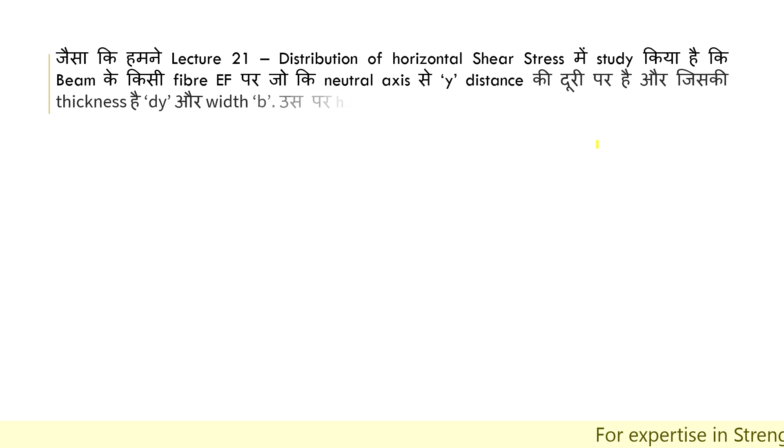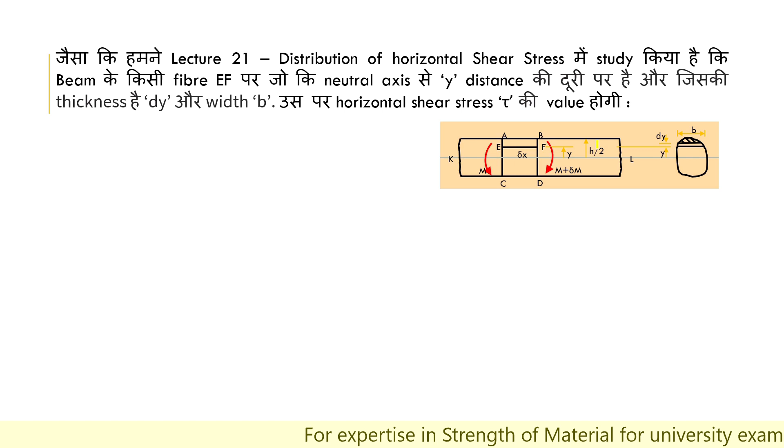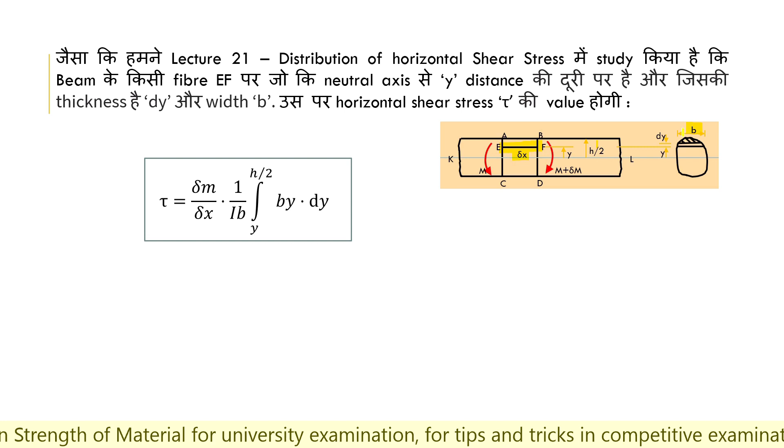As we studied in Lecture 21 on Distribution of Horizontal Shear Stress, for a fiber EF in the beam, at a distance y from the neutral axis, with thickness dy and width b, the horizontal shear stress tau is given by tau equals del M by del x times 1/IB times integration of b y dy from y to h by 2. In this figure, this is the fiber EF of length del x and width b, visible in the area of cross section, lying at a distance y from the neutral axis shown by the blue line. This is the general equation giving the value of horizontal shear stress in such a case.

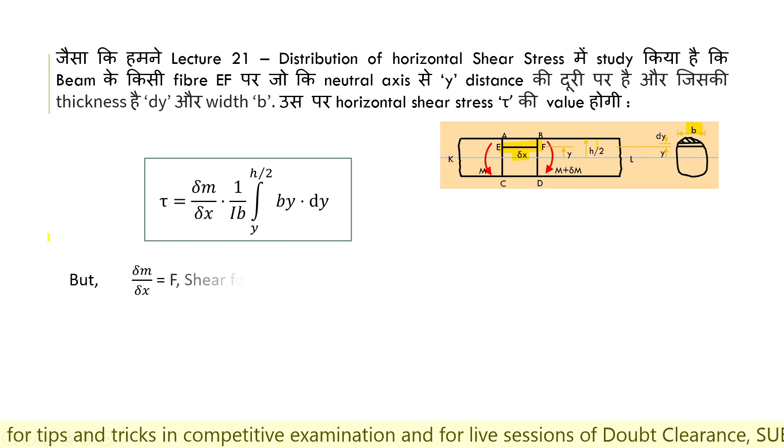Now we know that del M by del x, the differentiation of moment with respect to x, is equal to force - this is the shear force at the section. So we put this value of del M by del x equal to F in the given equation. We get tau equal to F upon IB, integration of b y dy from y to h by 2. Let this be equation B, which is the generalized equation.

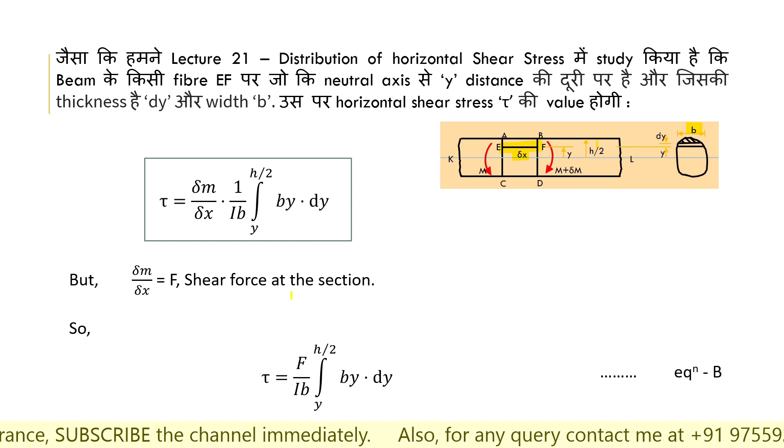This equation we had derived earlier. Now we will use this equation, equation B, for our derivation of the cases of rectangular and circular cross section. So now we will use this same equation further.

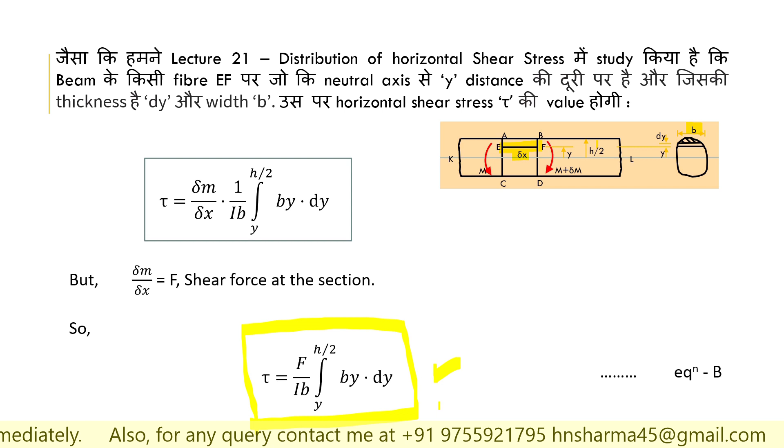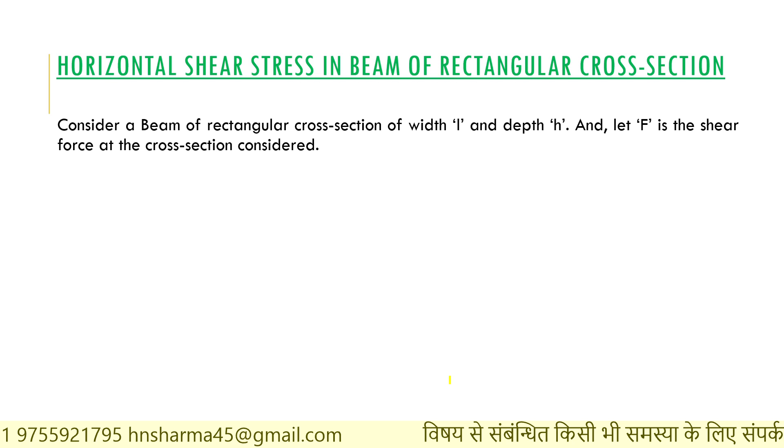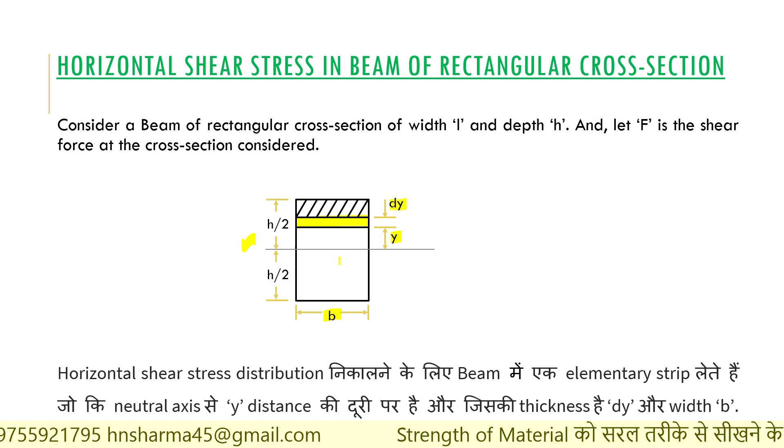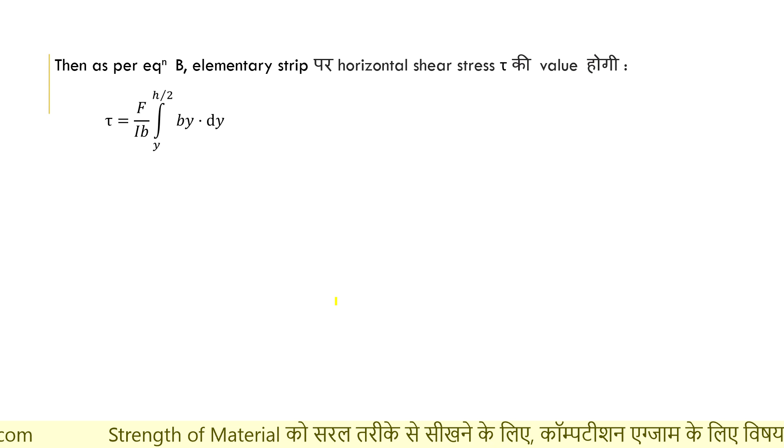Then, as per equation B, the generalized equation we will use here, the horizontal shear stress tau on the elementary strip will be tau equal to F upon IB integration of by dy from y to h by 2. Integrating further, we get F upon I times y square by 2, because b gets cancelled out as it's a constant value, and integration of y gives y square by 2, with limits from y to h by 2.

Further simplifying, we take out the 2 since it's a constant. So we get F upon 2I, y square, with limits from y to h by 2.

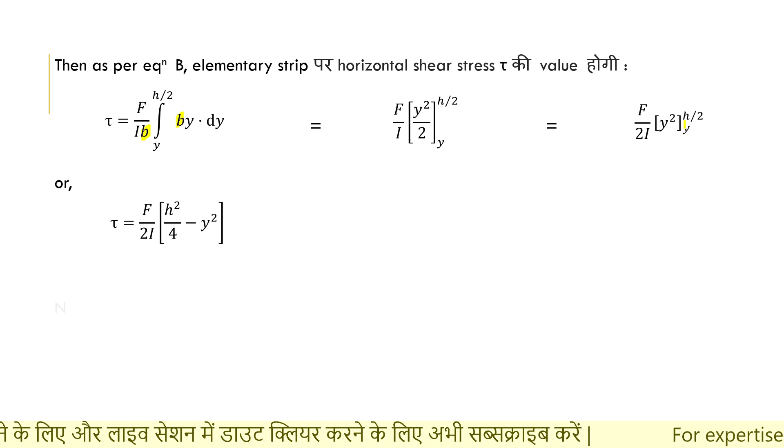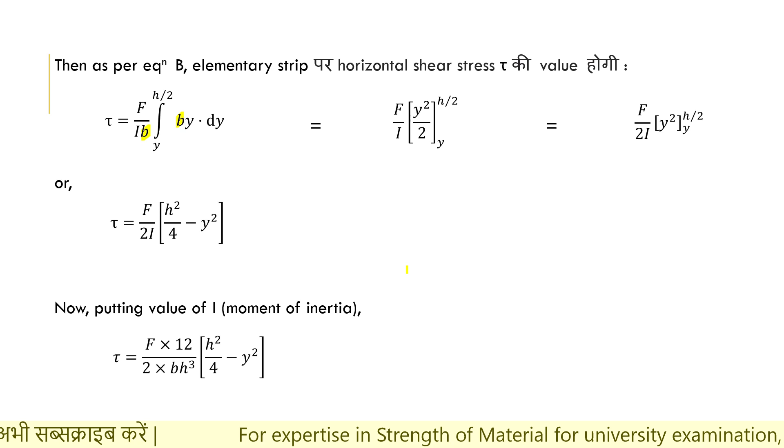Now putting these values of h by 2 and y, we will get tau equal to f upon 2I into h square by 4 minus y square. Now putting the value of moment of inertia I, we know moment of inertia for the rectangular cross section about its neutral axis is bh cube by 12. So putting this value in the equation of tau, we get tau equal to f into 12 by 2 into bh cube, into h square by 4 minus y square.

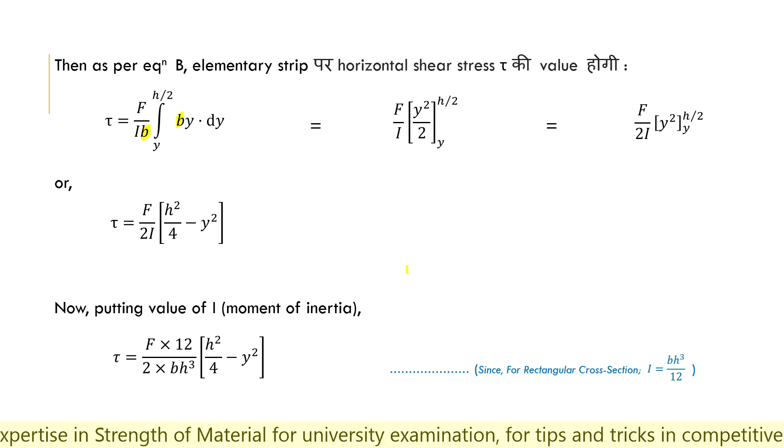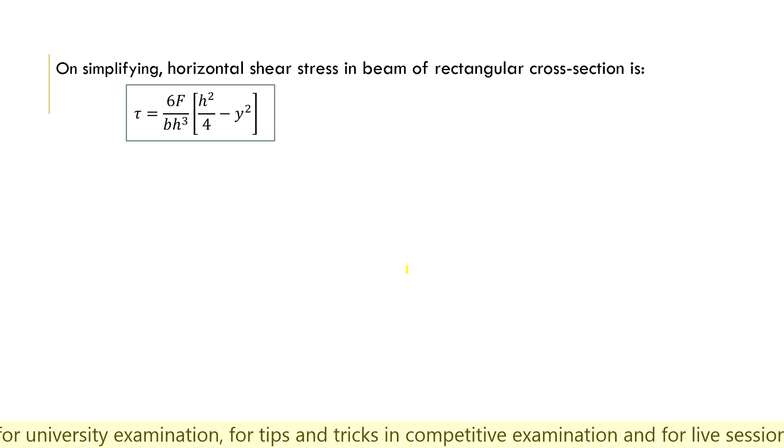Since for a rectangular cross section, I equals bh cube by 12 as we just discussed, simplifying it further, the horizontal shear stress in a beam of rectangular cross section is tau equal to 6f by bh cube into h square by 4 minus y square. This is the equation that gives us the value of horizontal shear stress in the beam of rectangular cross section. Let us say this is our equation number 1.

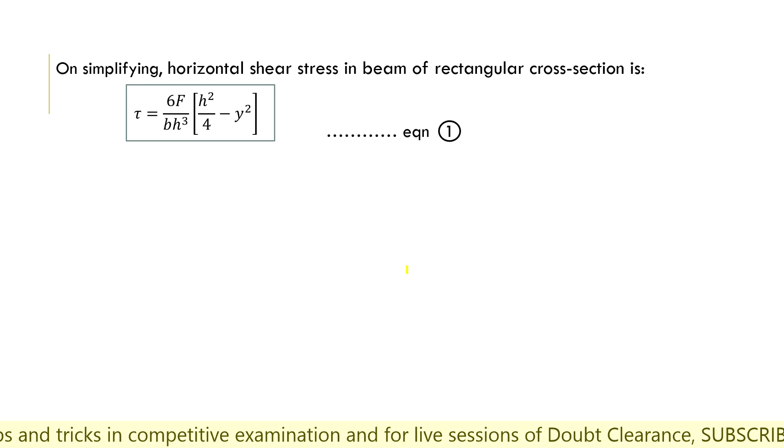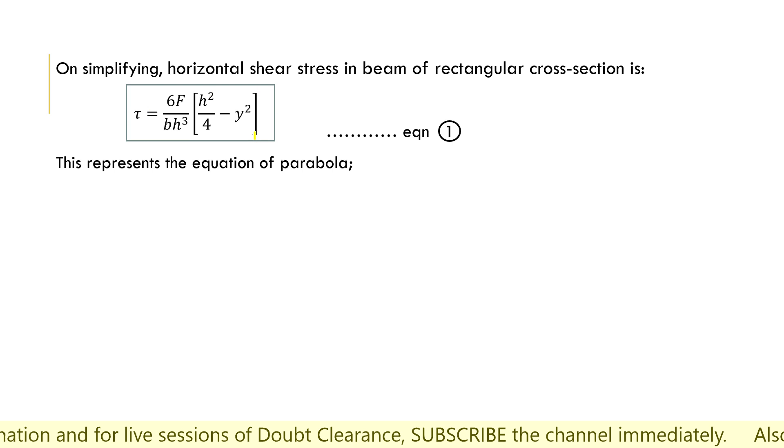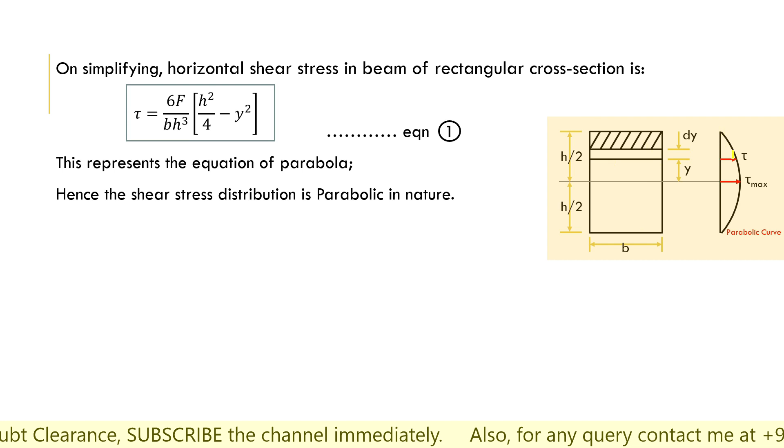This represents the equation of a parabola because here we have minus y square, so this is the format of a parabolic equation. It means that in a rectangular cross section, the distribution of horizontal shear stress is parabolic in nature, as we can see in this diagram. Here this is the rectangular cross section and this is the line of the parabolic curve, marked here. This parabolic curve represents the parabolic distribution of horizontal shear stress. This vertical line is for reference, and this curve represents the distribution of horizontal shear stress in case of rectangular cross section.

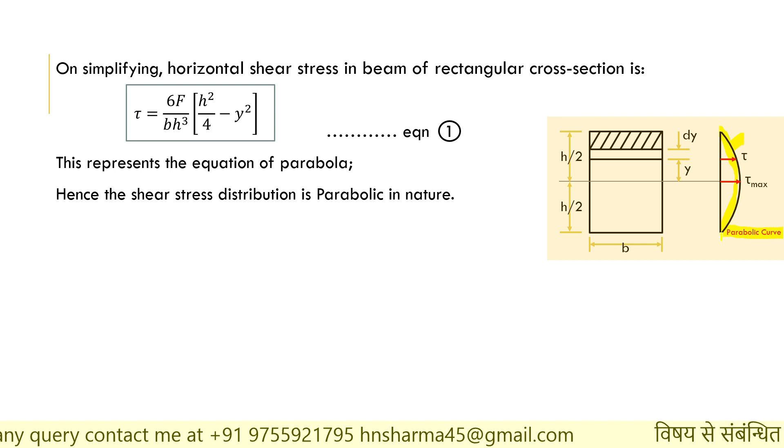Now at y equal to h by 2, meaning at the top fiber or at the bottom fiber, putting this value of y equal to h by 2 in equation number 1, we get tau equal to 6f by bh cube into h square by 4 minus h square by 4, which will be equal to 0. So at y equal to h by 2, meaning at the extremes, at the top fiber and at the bottom fiber, the value of tau at both places will be 0, and this is also visible here - the tau is 0 here, and the tau is 0 here as well.

And at y equal to 0, meaning at the midpoint or at the neutral axis, putting this value of y equal to 0 in equation number 1, we get tau equal to 3 by 2 dot f by bh. This represents the maximum value of shear stress on this rectangular cross section, and we can see this in the diagram here. Here you can see this is the portion of maximum shear stress, tau max, which we have marked here. So this lies at the neutral axis.

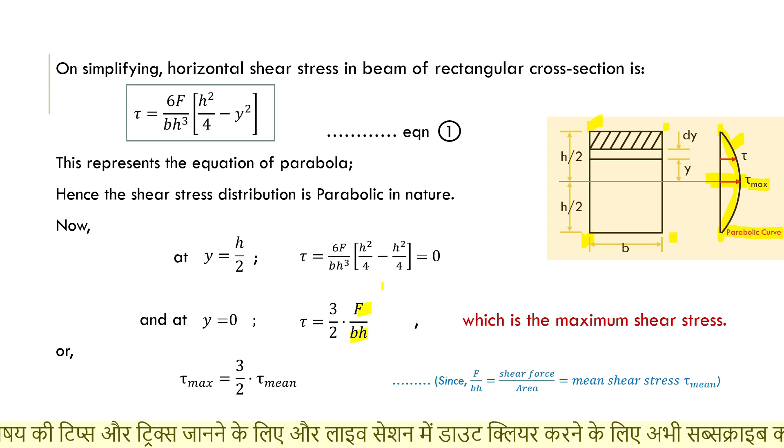Now we can write that tau max is equal to 3 by 2 of tau mean, because f upon bh, which we have written here, is shear force upon bh meaning area. So force upon area is basically the mean shear stress. So it means that tau max will be equal to 3 by 2 of tau mean for the case of rectangular cross section. Now let us find out the value of horizontal shear stress in a beam of circular cross section.

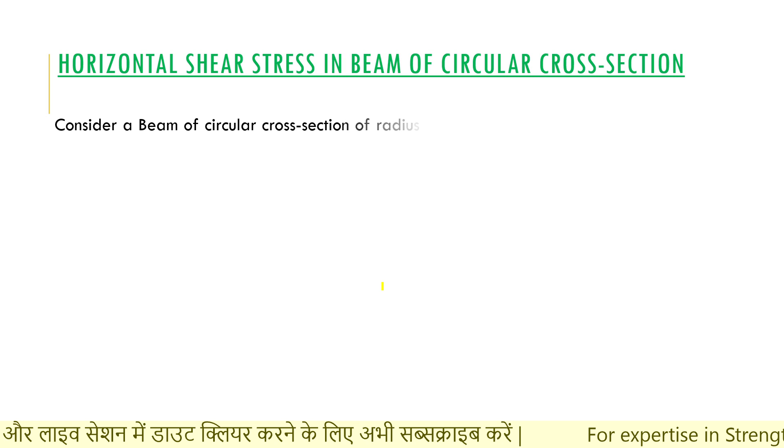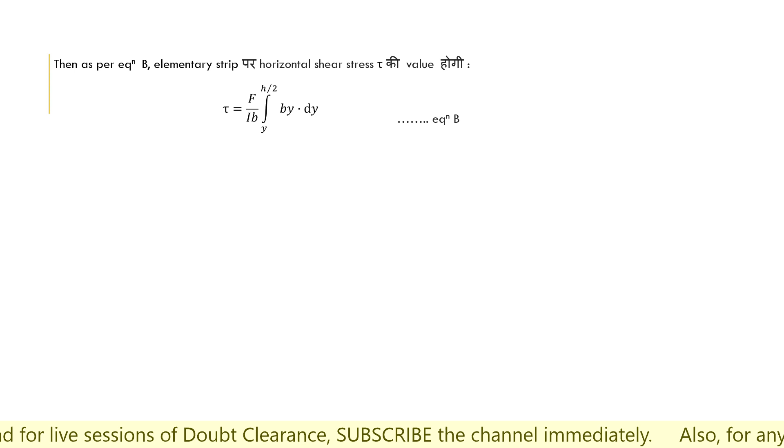That was our equation number b. Now from the figure we have y equal to r sin theta.

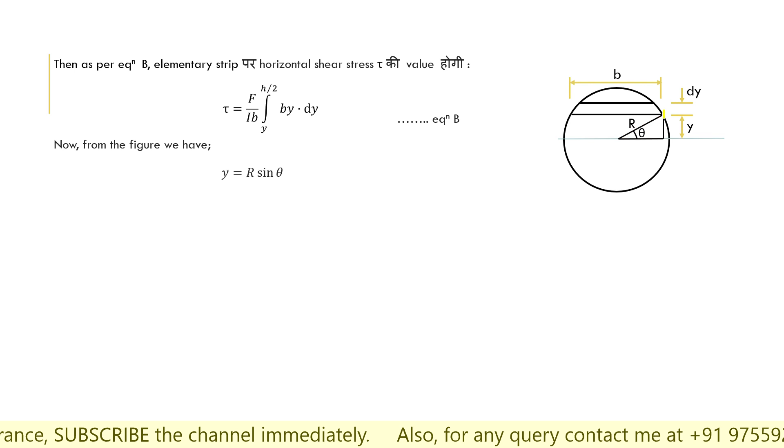We can easily see here, I have made a slight construction. This is the radius r, from here I drew a vertical line and a horizontal line. Now this angle is theta, so we can easily find out with the help of geometry that this vertical height, that is y, will be equal to r sin theta, and b, that is the width of this strip, this is equal to twice of this distance, meaning r cos theta.

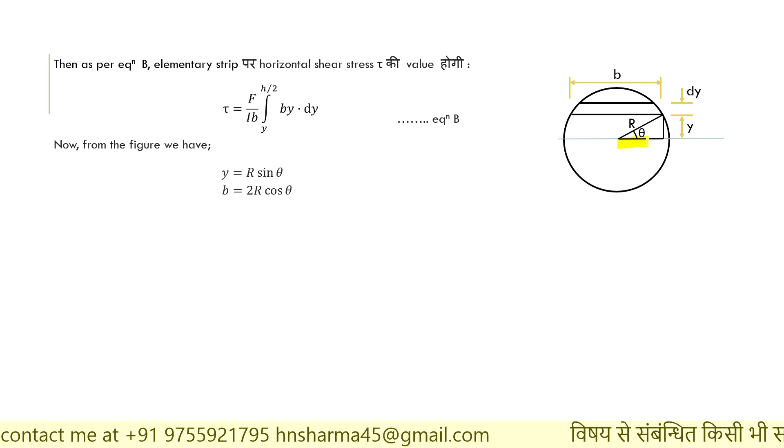R cos theta means from here, center point to this point, this is r cos theta, and since b is twice of this distance, so b is equal to 2r cos theta, that we can easily understand. Now let me draw the enlarged view of this particular area so that we can easily calculate.

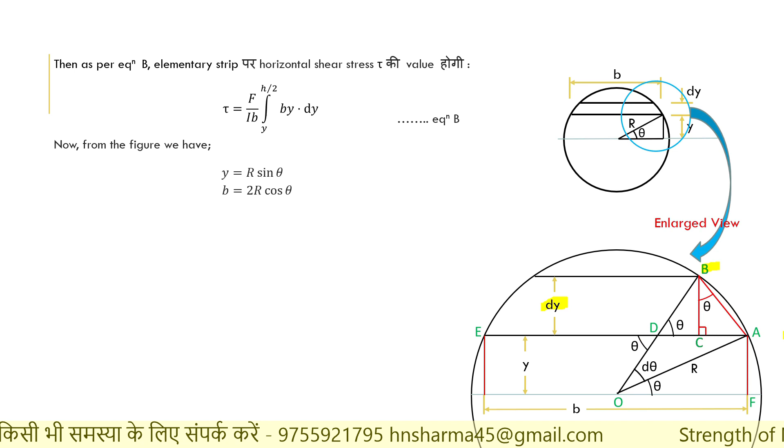Now I have made some geometrical construction here that we can see in this diagram. This is the strip we considered, whose thickness is dy. On the strip's upper line is point B and on the lower line is point A, on the circumference of the circle. Now I joined both these points A and B to the center point with the line AO and BO. Now angle AOF is theta, angle AOB is d theta, right?

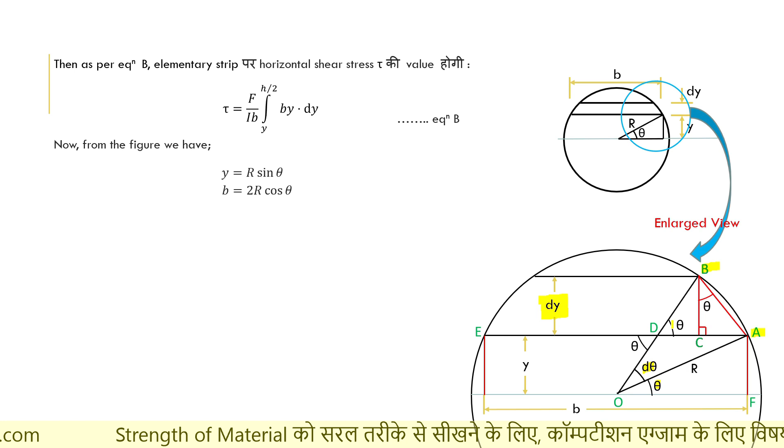Now this dy, which we considered, the thickness of this strip is very small. Since the thickness of this strip is very small, we can say this angle d theta, which is the included angle between the line AO and BO, is also very small.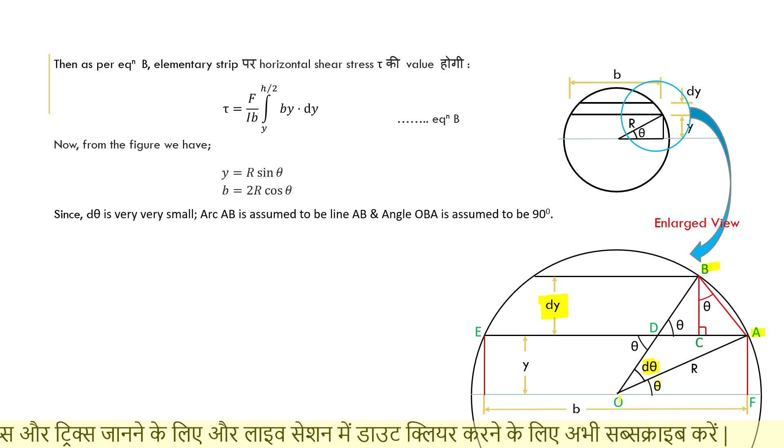Now because this d theta is very small, I can assume that arc AB is now a straight line. Since d theta is very small, I won't consider AB as an arc, instead I will consider this as a straight line AB, which I have marked in red color. Also because d theta is very small, I can say angle OBA will be 90 degrees, so I am taking this angle to be 90 degrees.

Now, angle BDA will be equal to angle EDO because these are opposite angles. Now, angle EDO will be equal to angle DOF. Now, how much is angle DOF? That is theta plus d theta.

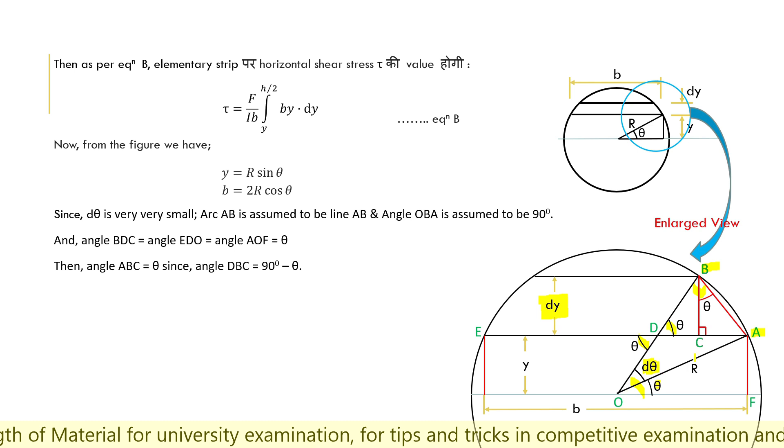Now, again, since d theta is very very small, I am neglecting d theta. This means angle EDO will be equal to angle AOF will be equal to theta. So when this angle is theta, since these are opposite angles, angle BDA will also equal theta.

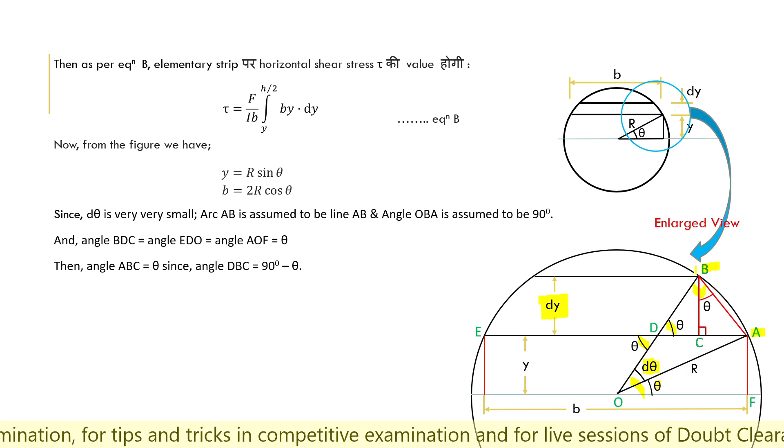Now I am drawing a vertical line from point B, meeting at point C, so this angle is 90 degrees. This means angle DBC will be equal to 90 minus theta, which means angle ABC will be theta.

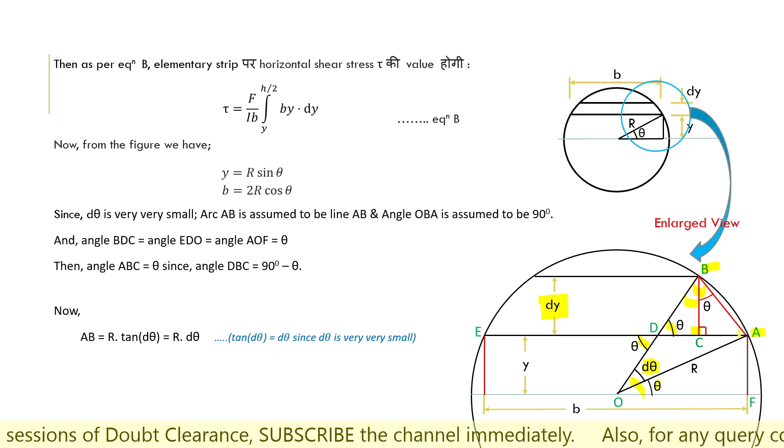Now we know that length of an arc will be equal to radius into tan of the included angle. This means length of this arc AB will be equal to R into tan d theta. But again, since d theta is very very small, I can write that tan d theta is equal to d theta, so this becomes R d theta. So AB equals R d theta now.

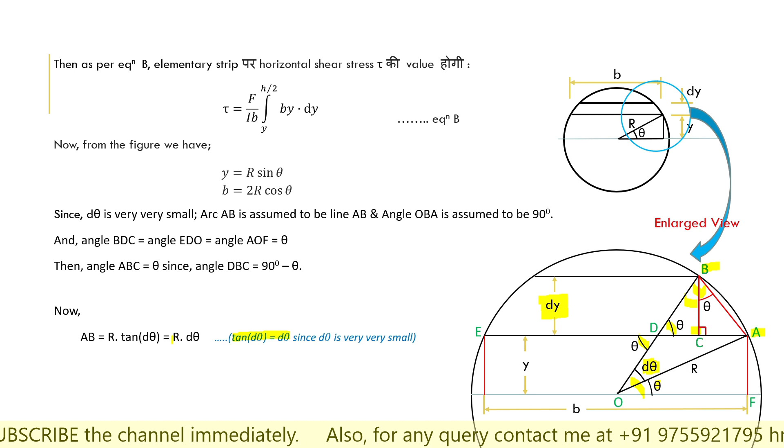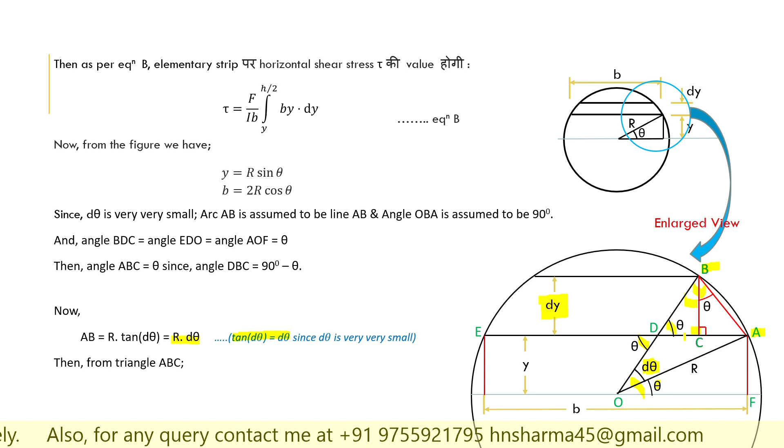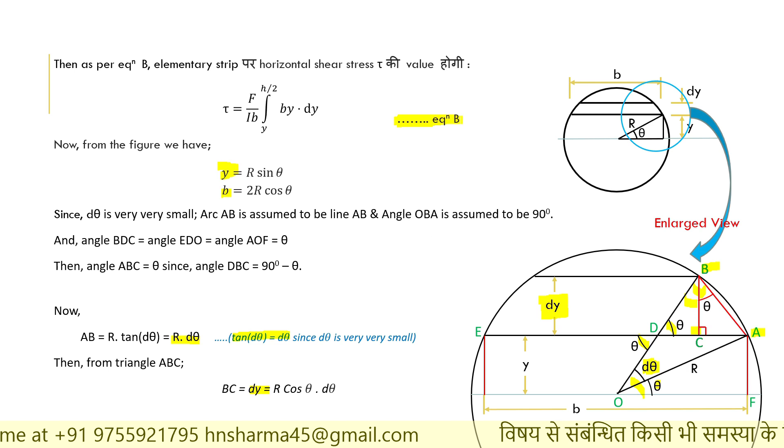Now considering the triangle ABC, I can say this vertical height BC, which is equal to dy, will be equal to AB cos theta. So I have found the values of all three, that is y, b, and dy, in terms of theta. And now I will put these values in equation b for further calculation.

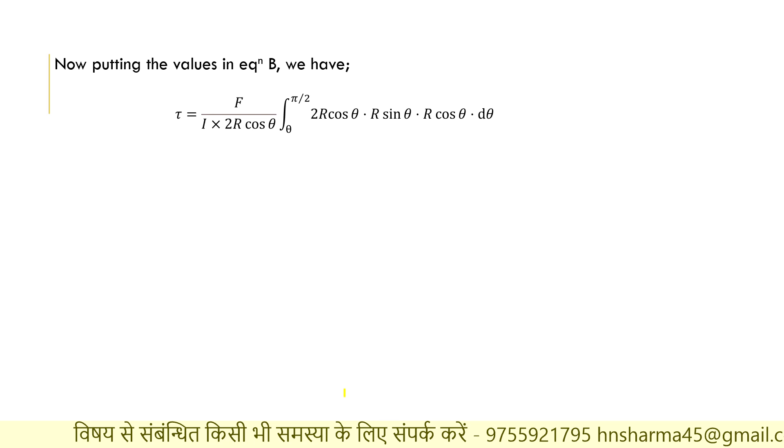So now putting these values in equation number b, we have tau equal to f upon I into 2r cos theta, integration of 2r cos theta dot r sin theta dot r cos theta dot d theta, from theta to pi by 2. That is, the limit of the integration is theta to pi by 2.

So now further simplifying it, that is f upon 2Ir cos theta, integration from theta to pi by 2. Now there are three r's here, so this is 2r cube, cos and cos, this is cos square theta dot sin theta dot d theta. So now taking out the r cube.

So this r cube, the cube will be cancelled with this r, so this will become r square. So f r square upon I cos theta, because this 2 will cancel out with this 2. And this will be the integration from theta to pi by 2 of cos square theta sin theta d theta.

Now integrating it further, we will get f r square by I cos theta, and the integration of cos square theta dot sin theta will be cos cube theta by 3, with limits from theta to pi by 2. Now taking out 3, which is the constant value, and putting the value of I, that is the moment of inertia, and the moment of inertia for a circular section will be pi d to the power 4 by 64.

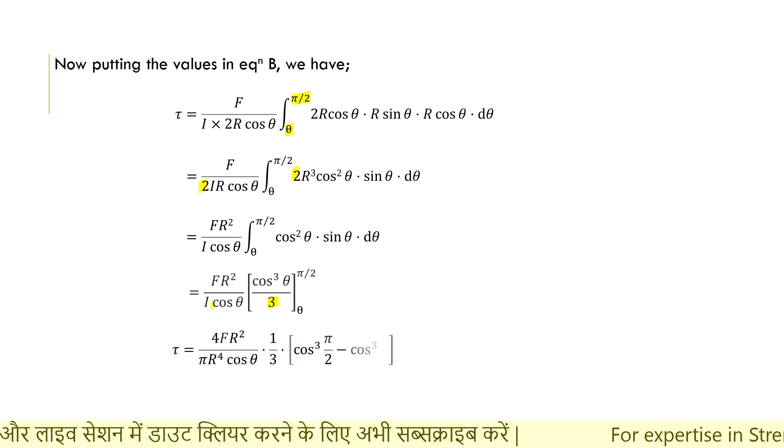by 64 or pi r to the power 4 by 4. So putting this value, we will get tau equal to 4f r square by pi r to the power 4 cos theta dot 1 by 3 dot cos cube pi by 2 minus cos cube theta.

So here we have put the value of I, and we know that I equal to pi d to the power 4 by 64 or pi r to the power 4 by 4. So I put the value here, and finally I got this expression.

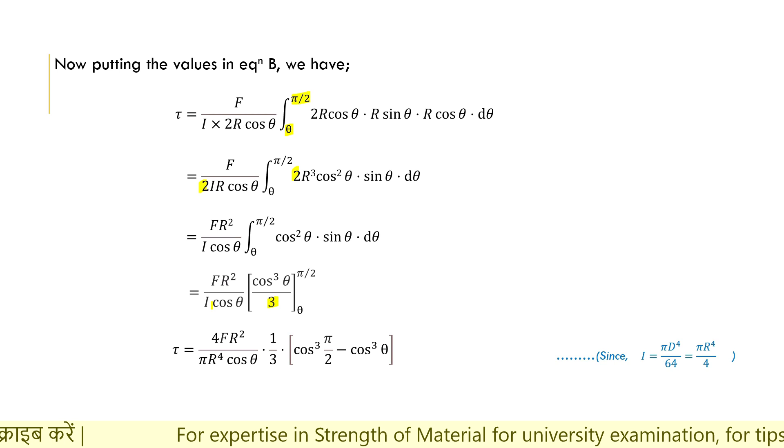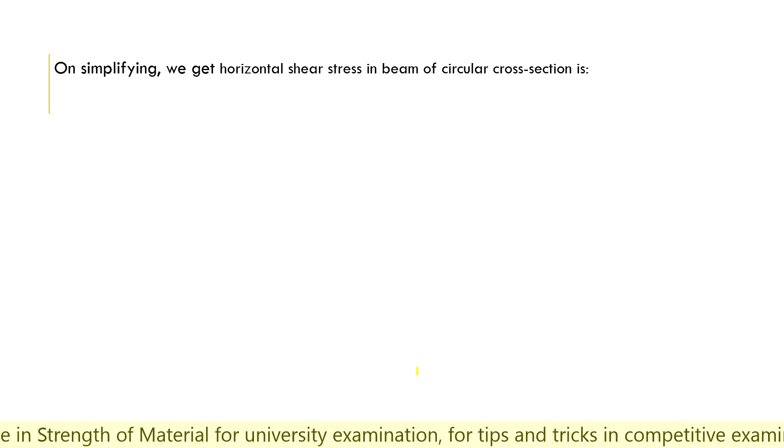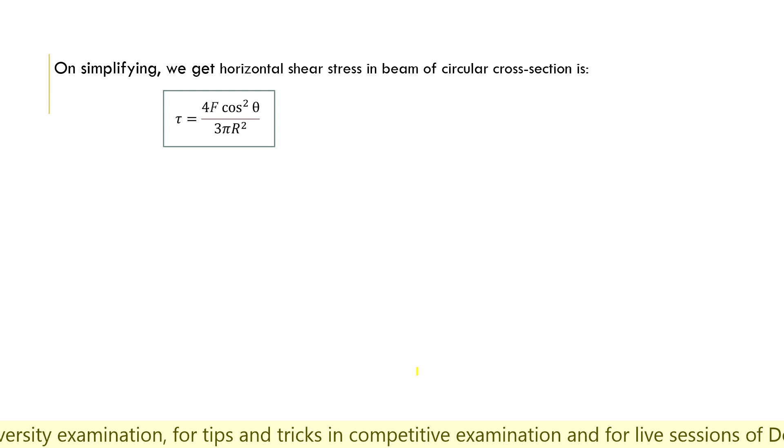Now simplifying it further, we get that horizontal shear stress distribution in a beam of circular cross section - finally, in a circular cross section beam, the horizontal shear stress value will be tau equal to 4f cos square theta by 3 pi r square. This is the final expression, and this expression gives us the value of horizontal shear stress in a beam of circular cross section.

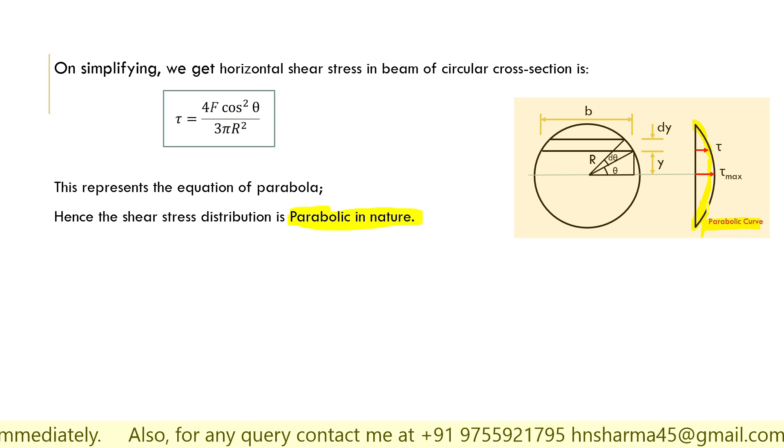And here also we can find out that at theta equal to 90 degree, means at the topmost point. At theta equal to 90 degree, when will this happen? At this point, or at the bottommost point, both.

Here, putting the value of theta equal to 90 degree in this expression that we found out for the case of circular cross section - so theta equal to 90 degree we will put in this expression, and we will get cos 90, that is 0, means tau equal to 0.

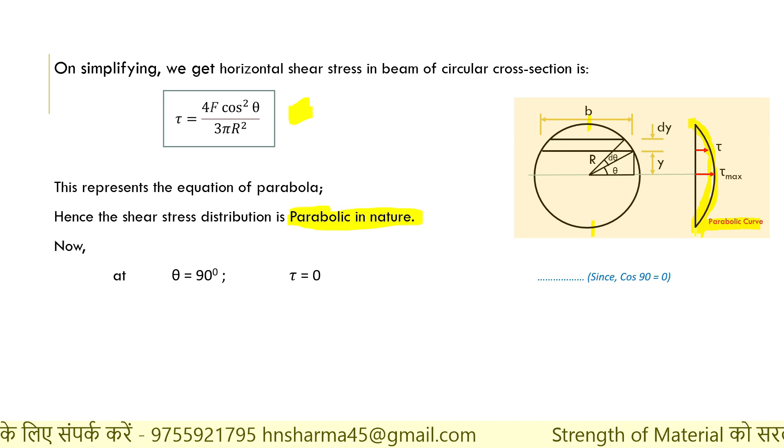This means at the top fiber or at the bottom fiber, the value of horizontal shear stress tau will be equal to 0. So here at both ends, at the top and at the bottom, we can see that the shear stress value is 0.

And at theta equal to 0 degree, means at the neutral axis, we can find out that cos 0 equal to 1. So the value of tau will be tau equal to 4f by 3 pi r square. So this is the horizontal shear stress distribution value at the neutral axis, and this is the maximum shear stress.

Now we can say that tau max equal to 4 by 3 of tau mean. Tau mean means shear force upon area, that is pi r square. So this is tau mean. So tau max equal to 4 by 3 of tau mean.